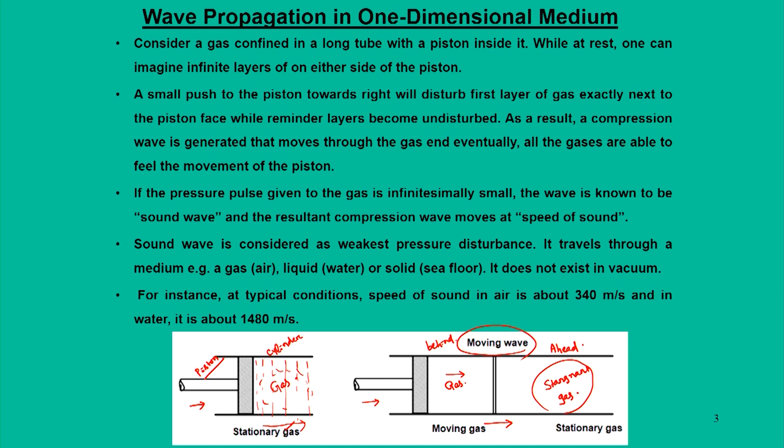So, having said this, we will try to give some kind of physical meaning in terms of data interpretations. There are two types of analysis we are looking at. One is moving gas analysis, the other is the stationary gas analysis. Now, we are sitting in a laboratory frame; when doing a moving gas analysis, we are sitting on the sound wave and try to see what happens ahead of this wave and what happens behind the wave.

So, in the initial state, a small displacement of the piston dV induces a wave that moves with speed of sound A in a stagnant gas which has initial pressure P and density rho, and because of this motion, the gas behind moves at some velocity dV, and in this region we have density rho plus d rho and pressure P plus dP.

And if you plot them in an xt diagram, that is a displacement-time diagram, we see the piston path and the pressure wave, that is the sound wave, moving in this direction. Along this sound wave, if you look at the pressure difference, one side it is P plus dP, the other side it is only P. In terms of velocity, the gas ahead of this wave has almost zero velocity, but behind it we have velocity dV. So, this is how we view the motion of the piston.

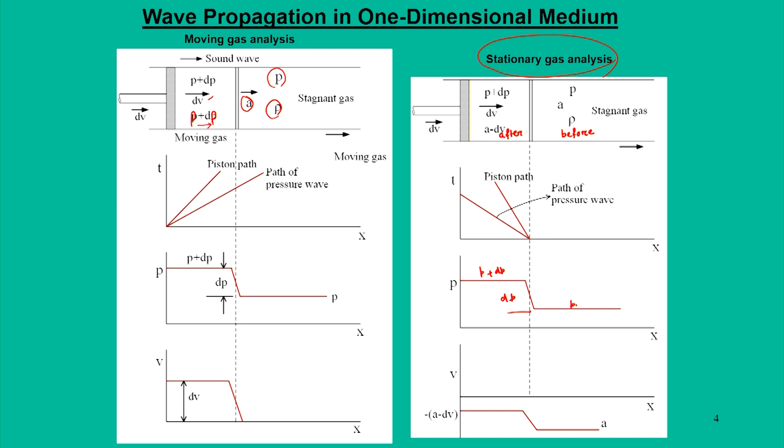Then moving further, let us now revisit the fundamental equations and try to frame the one dimensional flow equations. So, we consider some arbitrary region in space and try to analyze the flow field which is passing through this region. And to do that, we create a rectangular control volume, an imaginary control volume with rectangular cross sections, where the inlet condition is given by state 1 and the exit condition of this control volume is state 2.

The flow parameters that enter into the control volume are defined by flow velocity u 1, pressure P 1, temperature T 1, density rho 1 and internal energy e 1. So, these are the initial conditions. Now, after the flow gets out of this rectangular control volume, the properties change: velocity becomes u 2, pressure becomes P 2, temperature becomes T 2, density becomes rho 2. And for simplicity, we say it is a constant area, and that is A.

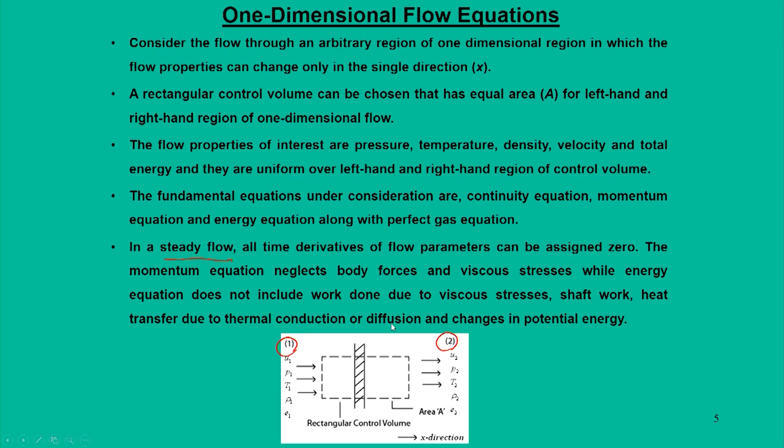Now, additionally, we also assume that the fluid that is entering is a gas, and mostly we look for air. And here it is a steady flow, which means all time derivatives of the governing equations can be assigned as 0. The momentum equation neglects body forces and viscous stresses, and the energy equation does not include work done due to viscous stresses, shaft work, or heat transfer due to thermal conduction and diffusion. Also changes in potential energy are neglected, but kinetic energy change is happening because u 1 becomes u 2.

So, now we revisit the basic integral form of flow equations for a steady flow analysis for the control volume. The continuity equation is defined for steady flow by neglecting the time derivative term, and if you evaluate that integral in a 1D framework, it becomes a simple expression: rho 1 u 1 is equal to rho 2 u 2, and this information is known at the inlet and the exit. That means, if you know the inlet condition, the exit conditions also can be obtained.

Now, coming back to the momentum equation, here also we neglect the time derivatives due to steady flow, and we also neglect body forces. So, this integral for 1D regions becomes P 1 plus rho 1 u 1 square is equal to P 2 plus rho 2 u 2 square, and this is steady, one dimensional flow without the presence of body forces.

Now, again for the energy equation, we do not take the time derivative, then we do not take the shaft work. Okay. So, the right hand side becomes only in this form, rho e plus u square by 2, and the left hand side, by neglecting the body forces and work done due to the body forces, this particular term also can be neglected.

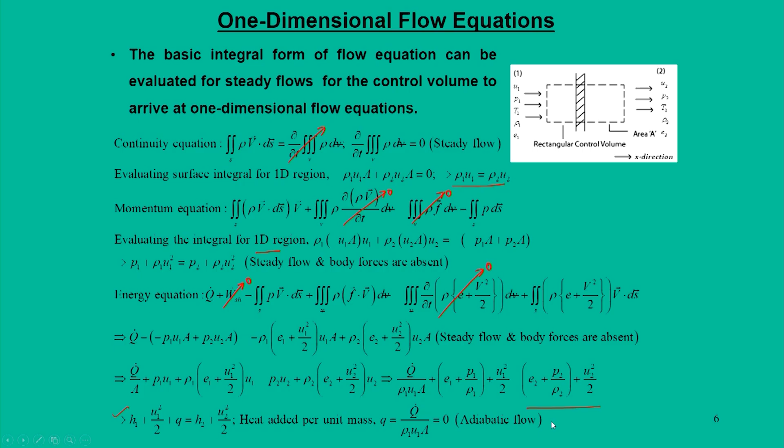Now, having said this, let us try to understand what happens to these one dimensional flow equations when you look at a wave front, which is nothing but a sound wave. So, in the figure here, instead of velocities at states 1 and 2 defined as u1 and u2, we are saying it is a sound wave front, and before this the velocity is a, and after this wave the velocity is a plus da. Likewise, there is a slight increment in pressure P plus dP, in density rho plus d rho, and temperature T plus dT.

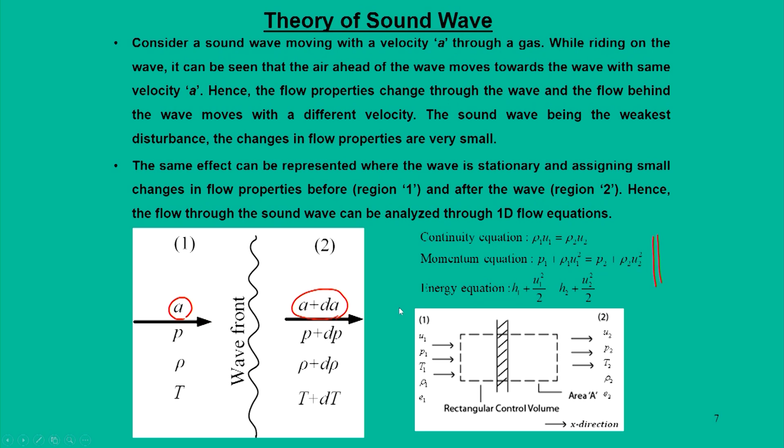So, now our main objective is to find out the value of a: how do we evaluate this a by studying the fundamental equations, that is the continuity, momentum and energy equations? How do these equations fit when we define this wave to be a sound wave?

So, we start with the continuity equation, with initial state, state 1, and state 2. By putting u1 and u2 in the continuity equation as a and a plus da, we can rewrite the equations. We can neglect the product of differentials, which involves d rho and da. So, ultimately after simplification, we get da equal to minus a over rho times d rho.

Then the momentum equation can also be simplified, where this is dP. The momentum equation can be simplified as da is equal to dP plus a square d rho, divided by minus 2a rho.

So, here what we are doing: from the basic equation, we start with P1 plus rho1 u1 square, put P on one side, P plus dP on the other side, and u1 as a and u2 as a plus da whole square. Neglecting the product of differentials and simplifying, we get da, and with further simplification we arrive at the expression a square is equal to dP by d rho. This expression is a differential equation.

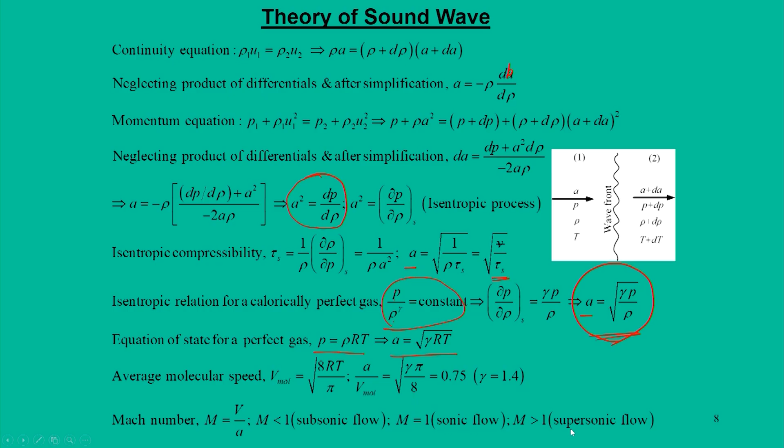Another important piece of information that I can share is that with this speed of sound, if we define the speed of the object as v, we can define a non-dimensional parameter called the Mach number, that is v by a. We can define it for subsonic flow, which is less than 1, for sonic flow, which is equal to 1, and for supersonic flow, which is greater than 1.

So, here I try to give, from whatever I explained, the inferences that we get from the theory of sound waves. The speed of sound wave is a direct measure of compressibility of the gas, defined through a parameter called isentropic compressibility. Second, speed of sound is 0.75 times the average molecular velocity estimated from the kinetic theory of gas.

Another thing we can say: if you take the ratio of kinetic energy to internal energy, that is v square by 2 divided by E, meaning the share of kinetic energy with internal energy at a given arbitrary situation, this particular parameter can be related to the Mach number. As the Mach number becomes higher and higher, dominance of kinetic energy is higher.

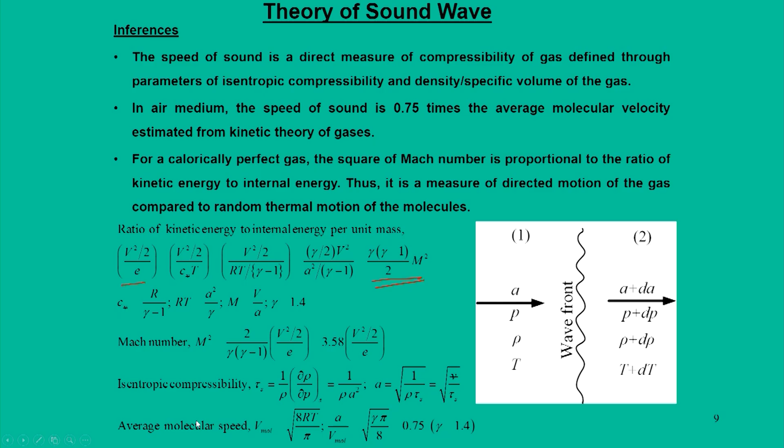So, the role of kinetic energy or speed of the body becomes a significant parameter. Through this we can find that M square becomes 3.5 times higher than this ratio. Already I have talked about isentropic compressibility and average molecular speed. So, these are some of the important inferences.

Then moving further, after defining the Mach number, we are now going to define another parameter called the characteristic Mach number. To define it, look at the streamlines drawn in a particular flow field. We look at a fluid element moving along a streamline with a velocity equal to the flow velocity at that point. Look at a point A where the fluid element has a velocity v and Mach number M.

Now, imagine that the fluid element changes its state from A to B. Either you slow it down, and the Mach number reduces, or you accelerate it to Mach 1. What I am trying to say is that at point B it has a Mach number of 1. Whatever the velocity at state 1, either you increase or decrease it so that at point B its Mach number is 1, and imagine that the entire process happens in an isentropic manner.

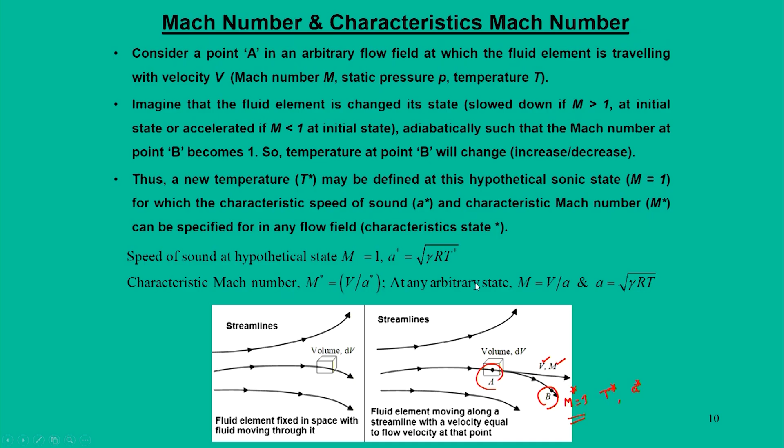So, with A star, we can correlate the information of point B with respect to point A by a parameter called the characteristic Mach number, M star is equal to V by A star, whereas for any arbitrary state, Mach number is defined as V by A.

Moving in this framework, we can now revisit the one-dimensional energy equation to see how this characteristic Mach number becomes relevant. We start with the energy equation, H1 plus U1 square by 2 is equal to H2 plus U2 square by 2, for an adiabatic situation, putting enthalpy as Cp times T, and Cp as gamma R by gamma minus 1 for a calorically perfect gas.

These equations can now be reframed by putting in enthalpy and Cp, and subsequently we assume the initial state is U1 and state 2 becomes the star condition, where we define the parameter A star. Putting this in the equation, we find an expression for any arbitrary state, involving A and U, related to the star conditions.

So, this relation becomes very vital from an analysis viewpoint in the energy equation in our subsequent situations. So, this is what we do when we use these equations, that is gamma R T1 by gamma minus 1 plus U1 square by 2 is equal to gamma R T2 by gamma minus 1 plus U2 square by 2.

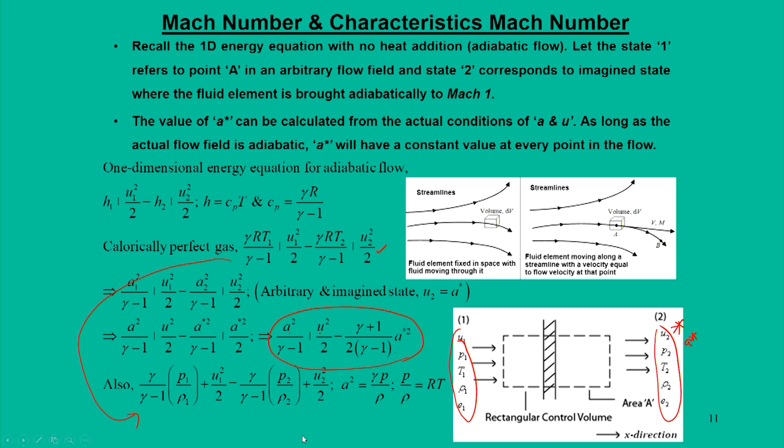So, now we are going to part 2 of this lecture, which involves the speed of sound and Mach number. Till this point of time we have covered the first 4 segments, that is wave propagation in a one dimensional medium, one dimensional flow equations, theory of sound waves, Mach number and characteristic Mach number. Now, with this information we are going to classify the flow regimes in a compressible domain.

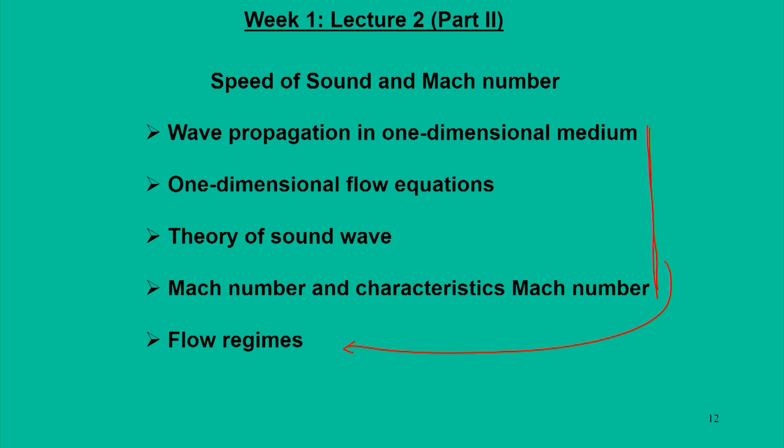To classify the flow regime in a compressible domain, let us try to understand the basic difference between incompressible flow and compressible flow. As a fundamental understanding, incompressible flows are characterized as flows in which the density is presumed to be constant throughout. All liquids are incompressible, and for flow of gases under certain conditions, the density changes are so small that the assumption of constant density can be made with reasonable accuracy. So, this is what happens in an incompressible flow.

Now, when you enter into the compressible domain, the effect of compressibility becomes a dominant factor. So, at what condition does it become dominant? We define compressible flow as variable density flow, where the density changes are considered to be 5% or higher. So, compressible flow begins at 5%, and subsequently as the density change becomes more and more significant, different flow regimes can be classified.

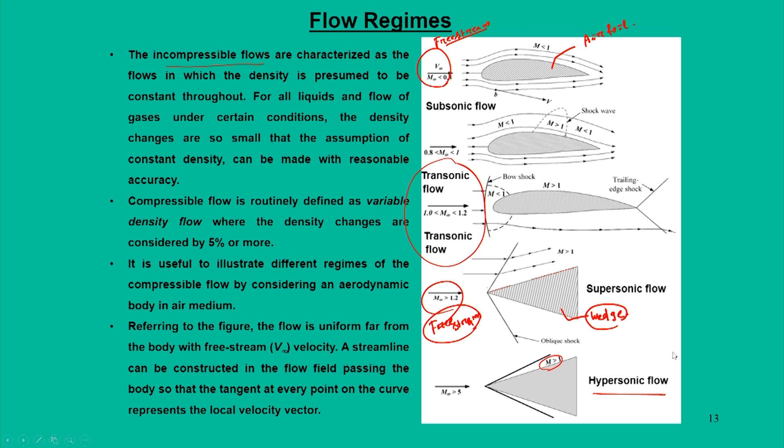So, it is as if there is a strong region of high temperature and pressure which gets induced by the free stream flow, and such a flow is characterized as hypersonic flow. So, this is the entire information on the flow regimes. Now, let us go one by one, which I have elaborated here.

So, we look at an arbitrary point in the flow field, where you denote the pressure, temperature, density and velocity, and this is at some point downstream in the flow. It can be on the surface, it can be on any streamline downstream of the flow, and this downstream flow gets affected by the nature of the free stream flow.

So, for this we classify two Mach numbers. One is the free stream Mach number M infinity, which is associated with the free stream flow. The other is the local Mach number, which is encountered on the body surface. Okay. So, obviously, the Mach number is a non-dimensional parameter that gives the ratio of velocity to the speed of sound.

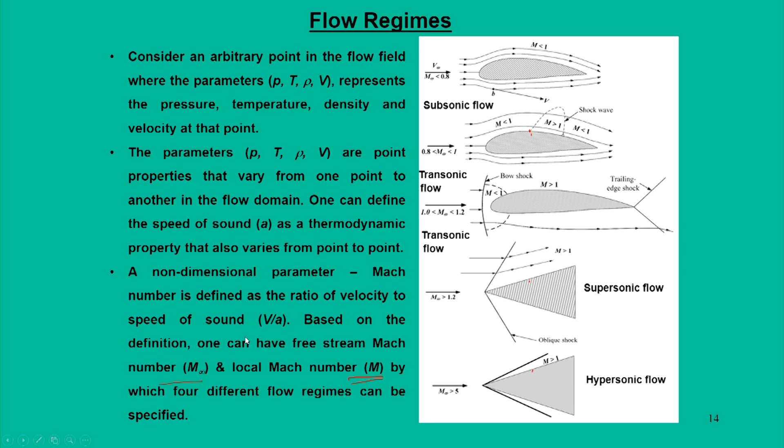Now, let us look at the characteristics of a subsonic flow, when the free stream Mach number is less than 0.8. In this case the local Mach number is less than unity everywhere in the flow field, and the flow is characterized by streamlines with continuously varying properties over this airfoil.

Okay. Now, when you move on to transonic flow in the range of 0.8 to 1.2, this particular domain, we see that initially we have a shock wave on the surface, and the shock wave moves downstream, moves upstream, and it becomes a bow shock that sits ahead of the leading edge of the airfoil, and that distance is called the standoff distance, which is defined by this term.

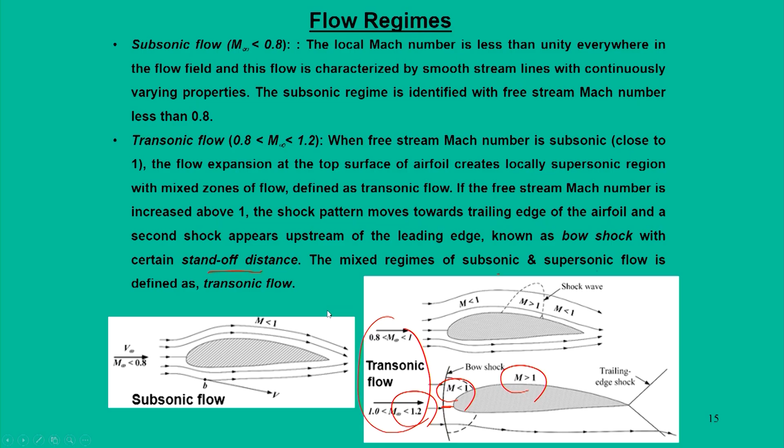And this particular zone is a mixed region of subsonic and supersonic flow, which means on this side you have supersonic, here subsonic, and again we have supersonic flow. So, this is called a transonic flow. That means a flow field involving both subsonic and supersonic nature is a transonic flow.

Then moving to supersonic flow, which is characterized as free stream Mach number higher than 1, and of course, to be more precise, it has to be more than 1.2. When you have this, we will have streamlines which are parallel to the free stream before this shock, and here the shock wave is called an oblique shock, and after this shock the streamlines become parallel to the surface of this wedge, that is after it crosses the oblique shock.

That means the supersonic uniform free stream is not forewarned by the presence of the body until the shock wave is encountered. So, this is the characteristic of supersonic flow. And for hypersonic flow, when the Mach number is higher than 5, this oblique shock becomes thinner and thinner and it sits on the surface. So, the flow properties change drastically or exponentially within this thin shock layer close to the surface. This flow field is characterized as high temperature chemically reacting flow which prevails on this surface.

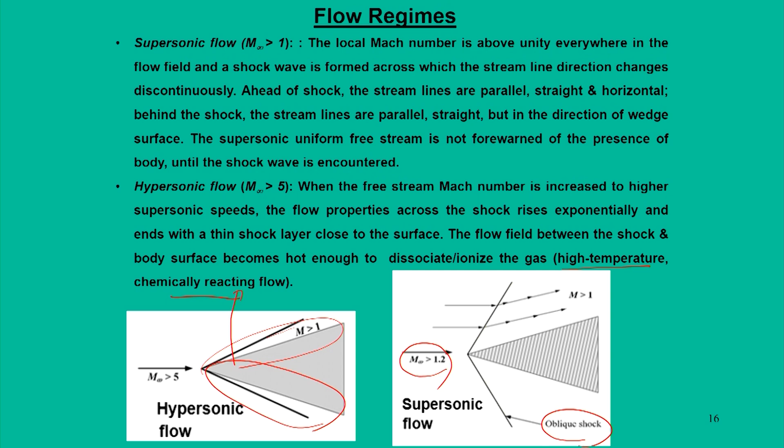So, all these flow regimes we have discussed so far are in the compressible domain. At the other extreme, we say that subsonic flow is felt when the Mach number is less than 0.8, but what happens much before that? Does any compressible effect really come into the picture or not? To see that, we call this incompressible flow. As I mentioned, if it is a liquid, the flow is completely incompressible, but gases have a dual behavior, incompressible and compressible. Under what circumstances gases behave incompressibly or compressibly is detected, again, by the Mach number.

To make it more precise, if you define the Mach number as V by a, Mach number becomes 0 means V infinity is 0, which means the body is not travelling. But from this equation, when a infinity goes to a very high value, the Mach number tends to 0, which means isentropic compressibility tends to 0. So, based on the relation between the speed of sound and isentropic compressibility, density variation is negligible. When there is no effect of speed of sound, the flow is completely incompressible.

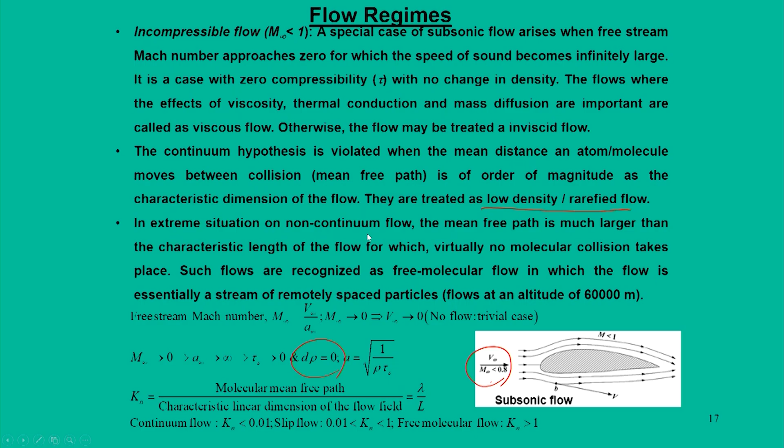As I mentioned previously, this parameter is detected by a number called the Knudsen number, defined as the ratio of molecular mean free path to the characteristic dimension, that is lambda by L. When the Knudsen number is much less than 0.01, we say it is a continuum flow; from 0.01 to 1, it becomes a slip flow; and when it is more than 1, it is a free molecular flow, as if there are no molecules present, which we call non-continuum flow. So, this is all about the flow regimes from incompressible to extreme hypersonic flow, the range of the compressible flow domain.

Our attention from the subsequent class onwards will mainly be the theory behind compressible flow, mainly for supersonic flow, and to some extent when the flow approaches hypersonic. Before I conclude, let me give some basic framework through a numerical problem with basic definitions of incompressible and compressible flow. We say density variations are quite significant in a compressible flow, but to what extent? Let us understand how density variations in a given flow field are calculated, based on which we judge whether the domain is compressible or not.

Here we have given a similar concept in the form of a problem: a low speed flow over an airplane wing with standard sea level conditions, the free stream velocity ahead of the wing is 45 meters per second. Flow accelerates over the wing to a maximum velocity of 70 meters per second at some point on the wing. What is the percentage change of pressure between this point and free stream, assuming incompressible flow? What is the density change between this point and free stream, assuming the flow to be compressible?

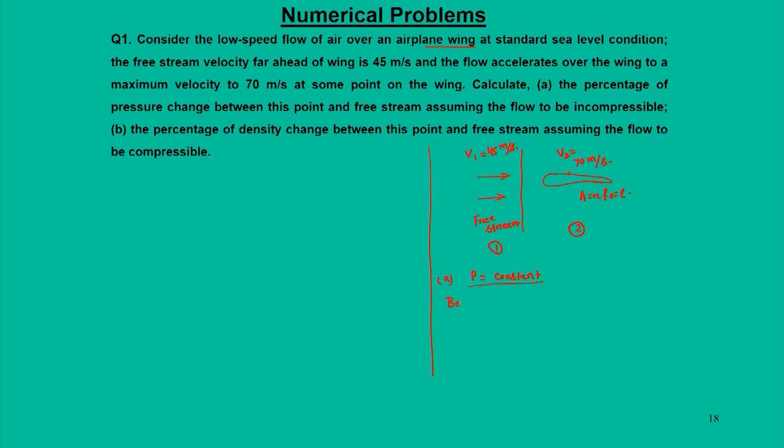So, the first part of the problem you can solve in this manner: since the flow is incompressible, that means rho is constant. So, once rho is constant, you can apply Bernoulli's equation, the fundamental Bernoulli equation, which you encounter in the conventional fluid mechanics course for an incompressible flow.

We can write P1 plus half rho1 V1 square is equal to P2 plus half rho2 V2 square. So, this will give you the basic information, that is P1 minus P2 is equal to half rho times V2 square minus V1 square.

So, here it is a sea level condition, for which we can say density may be 1.2 kg per meter cube, pressure is 101,325 Pascal, temperature, let us say, 288 Kelvin. So, this is the basic information that we will get from the sea level data.

So, from these equations we know rho, we have V2 and V1. So, we can find out P1 minus P2 as 1725 Pascal. This we get by putting in V1, V2 and rho. But what we require is the pressure change between this point and the free stream. That means P1 minus P2 by P1, that information we require.

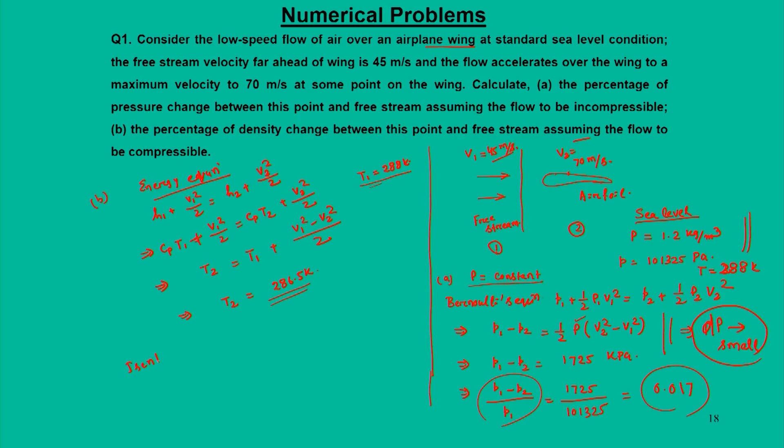So, recall this isentropic relation between temperature and density: rho2 by rho1 is equal to T2 by T1 to the power 1 by gamma minus 1. Since it is air, gamma is equal to 1.4, and we get rho2 by rho1, by putting in T2 and T1, as 0.98, which means rho2 is equal to 1.17 kg per meter cube.

So, how much change happens? From 1.2 kg per meter cube it changes to 1.17 kg per meter cube. If you take the ratio rho2 minus rho1 by rho1, this turns out to be 0.02, and since d rho by rho is within 2%, the flow is still incompressible. So, that means the compressible treatment is not relevant for this kind of situation.